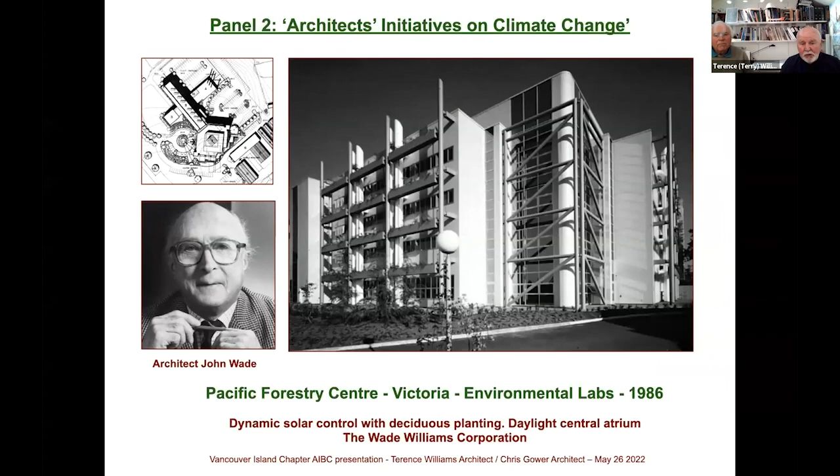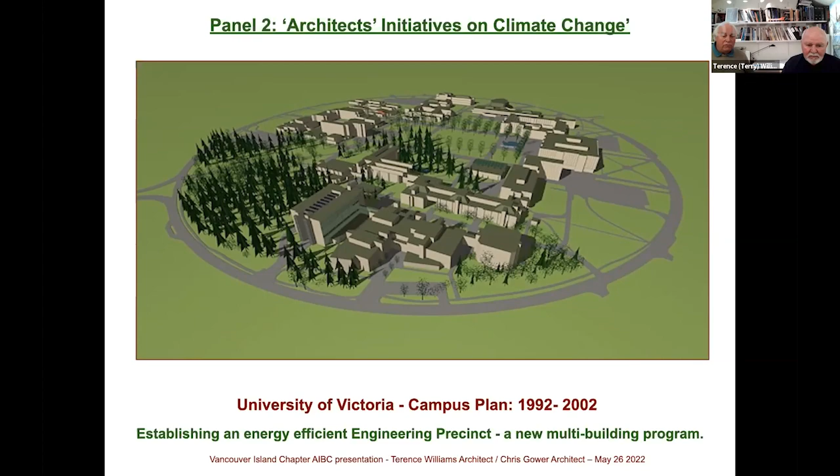Yes, so one of our big forums for our projects was at UVic, where Terry was commissioned to work on the campus planning for a new complex for the engineering faculty, the new department at the university. And we did the general site planning and then a series of buildings through the 90s. And they were very much attuned to sustainability and energy performance issues. The first building in that complex was the Petch building. And then the second one was the engineering office wing.

And this building was a quadruple glazing system, a 4-element curtain wall system, Visionwall at the time. We tried to tell the client that in this instance, perimeter heating would not be necessary. Bless his cotton socks, he didn't agree with that, so they installed a heating system. And then once the building was up, we proved that the perimeter heating system was redundant.

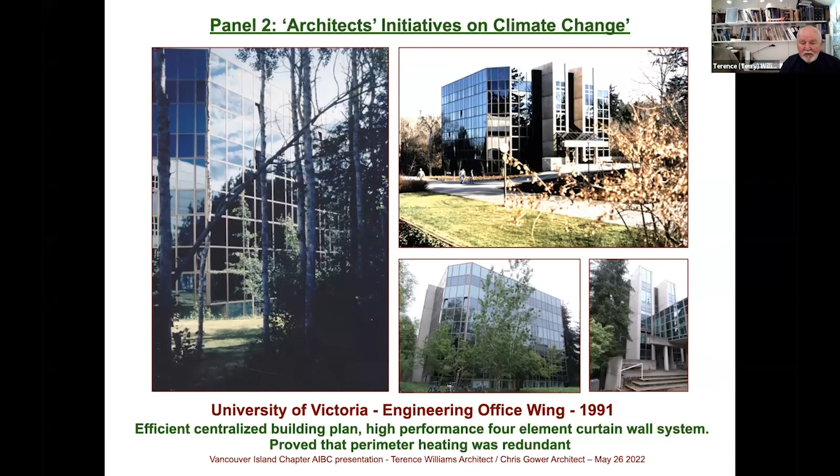So the next project was the engineering lab wing, much more elaborate. A lot of interest again in natural light, high performance window system, again, to minimize the amount of mechanical and the energy cost around the building. Natural light was reflected deep into the building. It had all sorts of measures to increase energy efficiency and sustainability.

Sustainability also relates to the lifespan of buildings. These buildings are all designed for a 50-year plus lifespan, which I think is critical in architecture in terms of contributing to a sustainable future. So in 1995, this was deemed to be the most energy efficient building in BC.

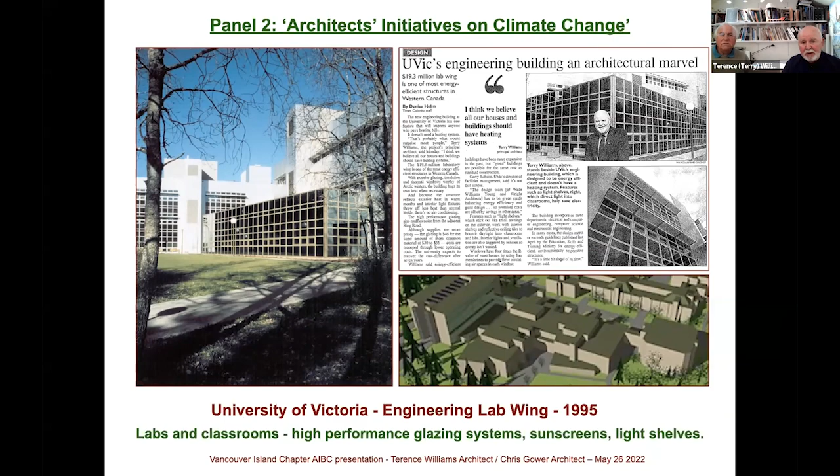That was followed up by the engineering computer science building late in the 90s. And again, it was a LEED oriented project. We were the first LEED gold large institutional building in the province. I think we actually got the second award, but we were the first submission. Big atrium building, interest in natural light and views.

The other thing I wanted to mention was the carry through and the involvement of project architects in projects. So you can see the atrium here. The air handling was a big function, using the atrium as a common void for moving the air up and down and bringing natural light in. We also made allowance for future solar collectors on top of the building. And again, some of the LEED credentials related to the views and the natural light through the atrium. Such a big building, we managed to keep the interior very pleasant because of those factors.

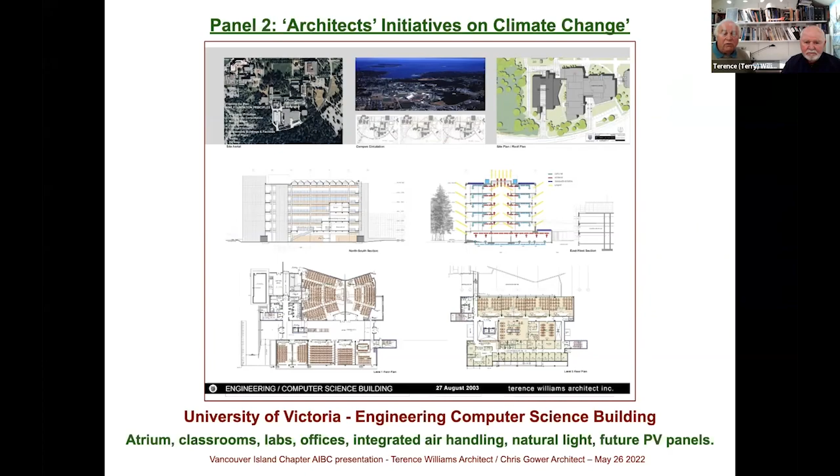The atrium face on the south. Again, in these projects, as an architect and a project architect, you have to devote yourself to every detail and make sure that they carry through. The sunscreens on the south face were actually in a separate price, and there were arguments to take them out. And as project architect, we had to do everything we could to make sure that they were installed to control the light and the solar gain on the south face of the building.

So there they are. And again, architects kind of work on the grand scheme of big ideas, but the application of actually what gets built is so critical.

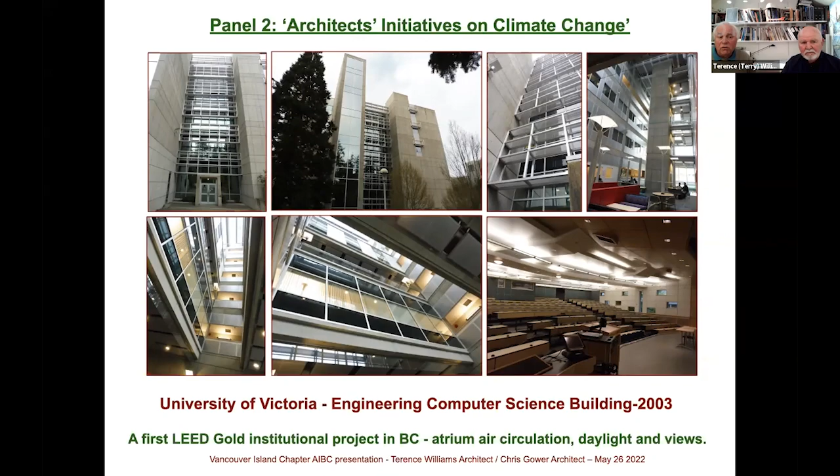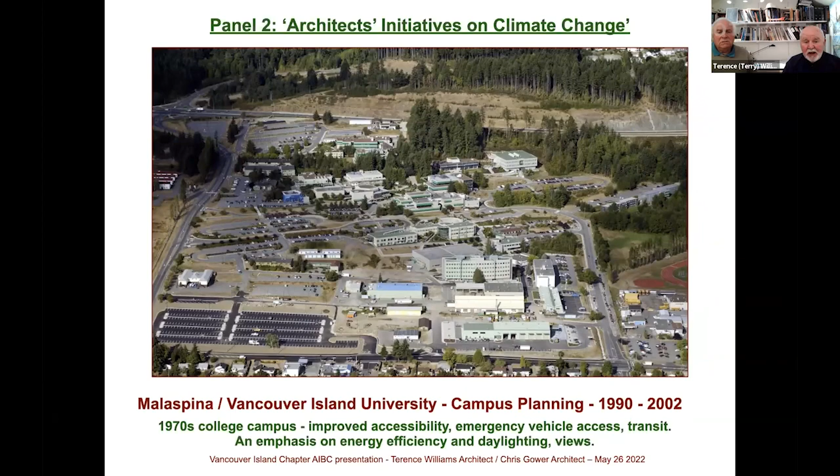Terry. Moving on then to essentially stepping out of single building design, but looking then at what was a Thompson Berwick Pratt college at one, and then we were engaged to do campus planning here. But from the client came the suggestion that we should actually be now looking at energy efficient buildings, and this was started in 1990. This is the overall campus plan, Chris.

Yeah, and we did a series of buildings, probably at least a dozen projects, including retrofits of the older buildings. We put new envelopes on these old wood-framed, wood-faced buildings, energy efficient rain screen systems, upgraded windows. All the new buildings were taken to the best performance available of the time in terms of energy performance. And the site planning had a lot of concern about accessibility, and it was a sloping site.

So we did a lot of site work orchestrating parking and pedestrian ways, water runoff, on it went. It was a great integrated project, and the individual buildings, I think, long-term, are still performing well. Some of the interesting things we did here: we were using quadruple glazing in 1990. We measured at one point the west-facing facade at 42 degrees centigrade on the outside of the glass. On the inside, because of the high-performing glazing, we were 21 degrees.

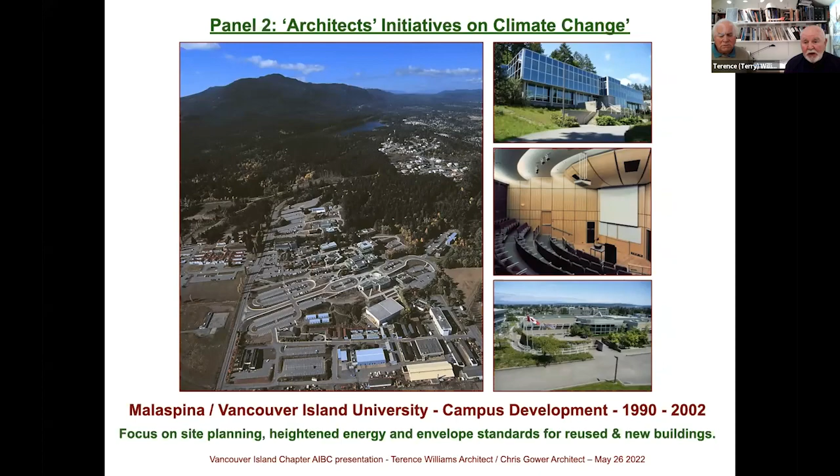So we were really feeling our oats in terms of glazing standards and interest in glazing, and we were commissioned by BC Buildings Corporation to look at the prospects for reusing the old BC Electric building, which is a landmark historic modernist building in Victoria, designed by Thompson Berwick Pratt with Ned Pratt and Ron Tom. It precedes the Vancouver BC Electric building. It was one of the first large curtain wall buildings in Western Canada.

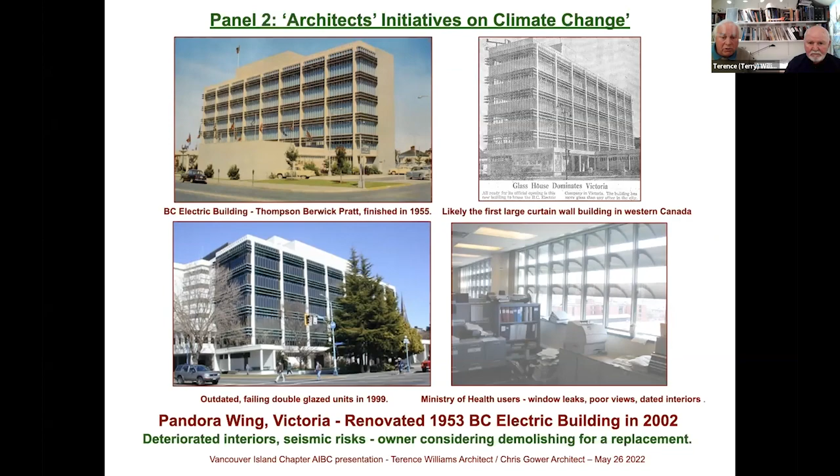It's a masterpiece originally of dealing with solar issues in the building: large curtain wall faces shaded by a sunscreen system. So it was a landmark building in Western Canada for modernist design, just a few years after the Lever House in New York City. We were aware of that architectural significance, but the building had to be updated. The curtain wall was failing. So we did intensive studies on options for the curtain wall. The client also was considering demolishing the building. So we were making the case to conserve the building and reuse it, which is a key component of sustainability.

Terry? Oh, no, let's go. Oh, the curtain wall. So you go.

Yeah, the curtain wall is, again, a high performance Conair 3, with actually a triple glaze system. We were able to reuse the sunscreens. We also introduced a viscous damper seismic bracing system, which is very innovative and has only been used in California. I think it's one of the only examples in Canada. It's a very dynamic system. Again, we were conserving the old building structure. We were able to reuse the sunscreens.

Thanks, Terry. Two levels. And we studied the sunscreens with computer analysis. We found that the original design was incredibly effective, and it also was designed to bounce natural light deep into the building. So we retained that. We could not use all the sunscreens, there was a lot of damage, but we found that only two levels of sunscreens did the job quite well and retained the views.

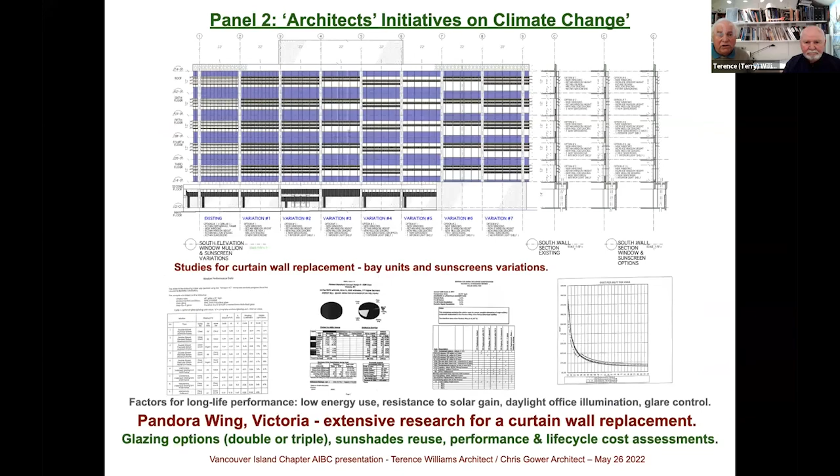The glazing, we studied all sorts of issues with glazing for natural light transmission, heat gain, heat screening, and views out. And we got the best example of glazing for this particular condition. The building is highly efficient. It's going to have another 50 years. The client challenged us with life cycle analysis to justify the whole project. And we were able to demonstrate, if you look long enough, it all pays for itself very nicely.

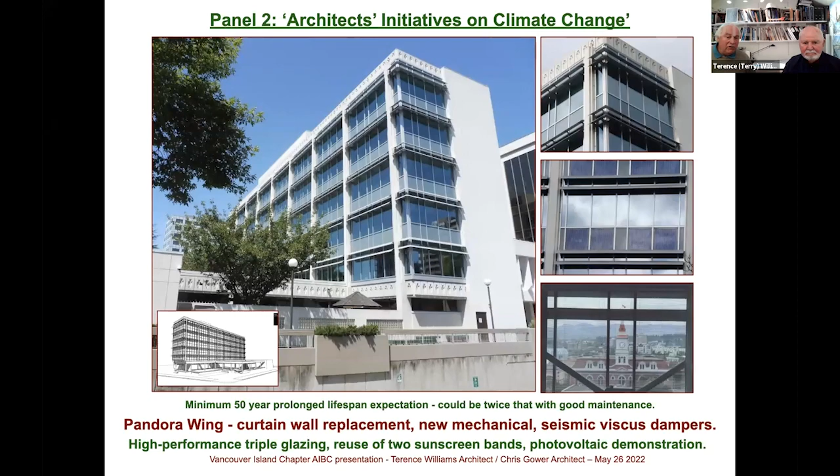So from the large scale to the small, we did a little cottage project for our structural engineer, John Wayte, and his wife, Judy. They were thinking of retiring out to a tiny Gulf island with no water supply, no power source. So we designed this off-the-grid little cottage for John and Judy.

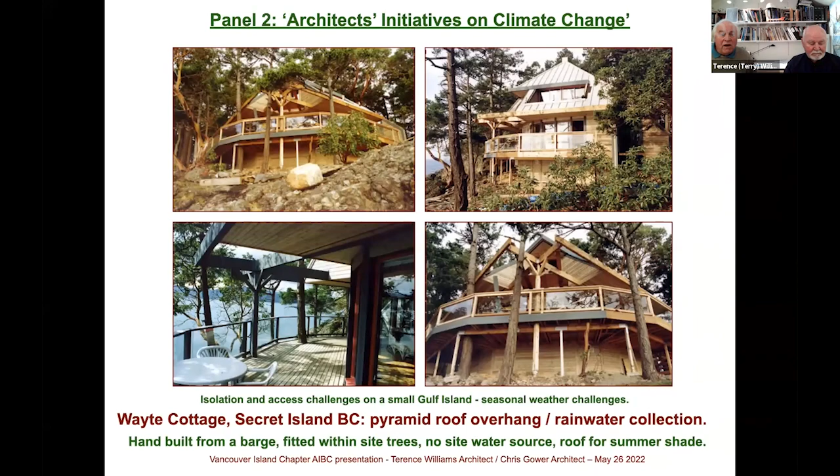And it's a really good example of, we may all have to be off the grid in a climate change future. This thing was designed with a pyramidical roof that captured all the rain and stored it. The roof also shaded the building and gave an overhang. It was all built from a barge by hand. It has its own little generator, its own water collection systems. They had lived there, I think, individually for over a decade.

And then moving on to larger scale projects, and obviously this is Dockside Green. In this instance, the initial project came from the City of Victoria, but particularly from Kim Fowler. And I'm not sure if you know that she has written a book called Dockside Green, the story of the most sustainable development in the world, she says. This is a very comprehensive planning study, and it's ongoing. It's the first project in Canada that we know of that was a LEED Platinum, and it's proceeding in that level.

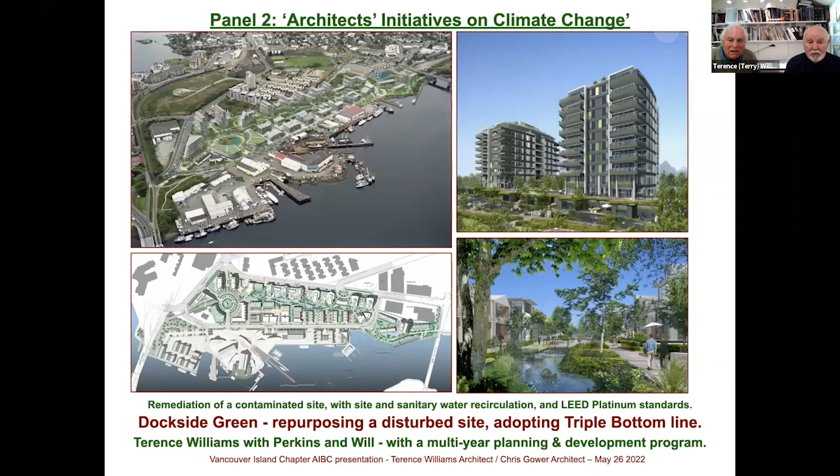So I worked on the envelope detailing of phase 2, and this again is where architecture gets applied, and the project architect has to pursue every detail of the envelope enclosure and the insulation and the rain screen. We used a very sophisticated panel system, Swiss Pearl panel, which has a very long life, huge step ahead from Hardie plank and so on. We were also able to insulate most of the exterior of the building. And the building also has a sunscreen system, which rolls down from a chamber above the south and west windows.

There was a phase 1 project also done for sustainability. We made improvements on the sunscreen system in the building, and also the air handling. I think there was a lot of attention to the quality of the air handling, all achieving LEED Platinum standards for this project. So again, the project architect really had to watch every detail and pursue them.

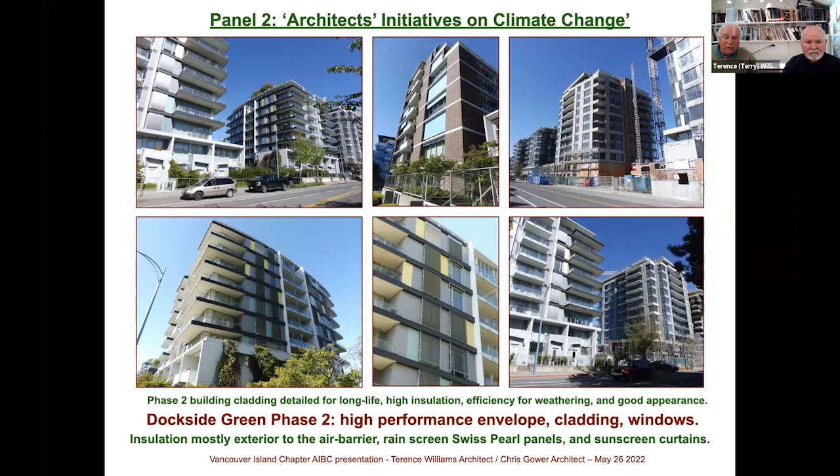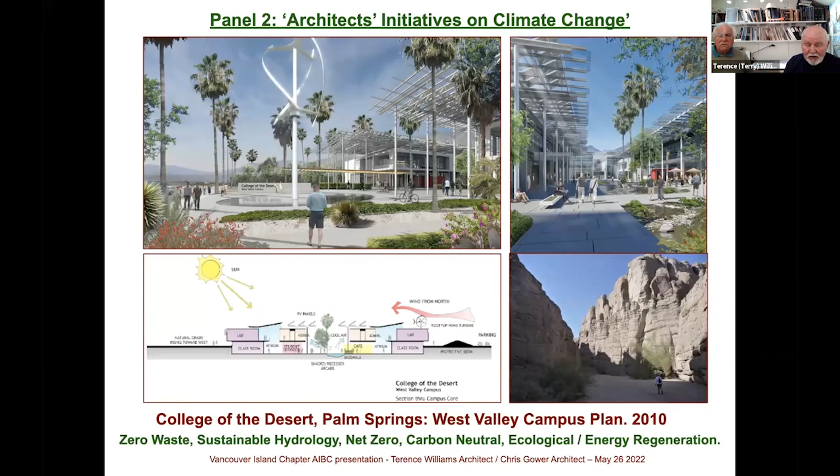And then moving on to a project that I was involved with in Palm Springs, which was the development of the West Valley campus for the College of the Desert. Involving here biomimicry, the box canyons of Palm Springs, and trying to interpret that for its long-term development. It's 160 acres, of which 60 acres were assigned to photovoltaic energy generation. This was essentially to be a net zero project, and a long-term development for the West Valley campus.

Also, I think it may be a model for survivability with climate change. We may find that half of the southwest of the United States is a desert, and we may have to have completely sustainable planning conditions. The other element of sustainability and climate change is how we plan cities. And that's really one of the biggest gestures, involves planners and public administrators and architects. We have to make our cities more intensive and more sustainable, reuse more buildings, reuse the infrastructure, and yet still keep the cities vital and interesting.

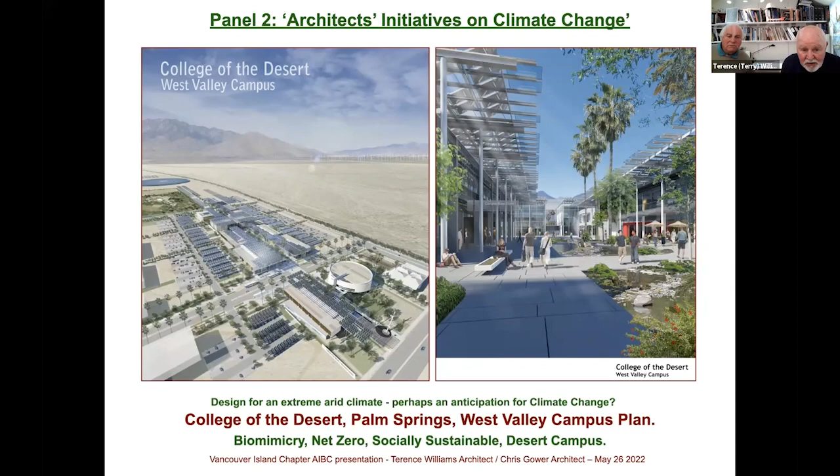I'm very interested in the history of cities. That's part of sustainability too, keeping our identity and our range of heritage context as well as new buildings. So I think that balance is really important as cities move ahead. Survivability is going to be a big topic in climate change. Yes, when it comes down to resiliency of single family dwellings to cities, I think that's going to be the issue.

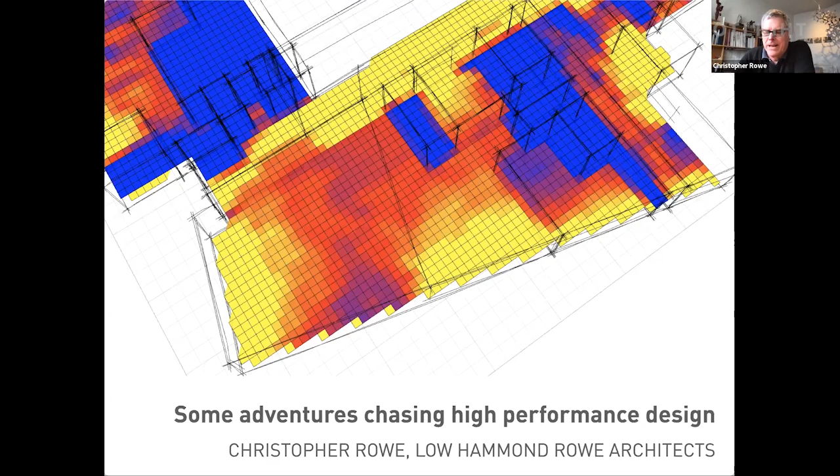I'm going to attempt to tell a little story about how I've learned over the last 20 years how to try to lead and try to get more control, I guess, over the performance of our buildings. So it starts back in the late 90s with an assignment to pursue LEED Gold for the Vancouver Island Technology Park, which is an old long-term care hospital under the care of BC Buildings Corporation, who were just getting the religion at the time. And I believe this project started under LEED 1.0 with the US Green Building Council, and that's how it was certified originally.

I point this out because I think we've moved on a long way from LEED. Obviously, there's still clients who are pursuing LEED. My critique of LEED is it doesn't go far enough with the pursuit of lower carbon, lower energy use in buildings. I note that even today, you get maximum points for only 50% below a baseline design, and I think we can do way better than that.

So I've been involved in a few LEED projects. Another notable one, when I was at Cannon Design, I was a sustainability facilitator for a 23-firm team of consultants for this project. Again, a lot of it had to do with ticking boxes to get that LEED certification, notwithstanding the fact that I think there were some excellent integrated design outcomes, particularly in terms of carbon storage with the extensive use of wood and a very ecological approach to dealing with the vast amount of rainwater that came off the building.

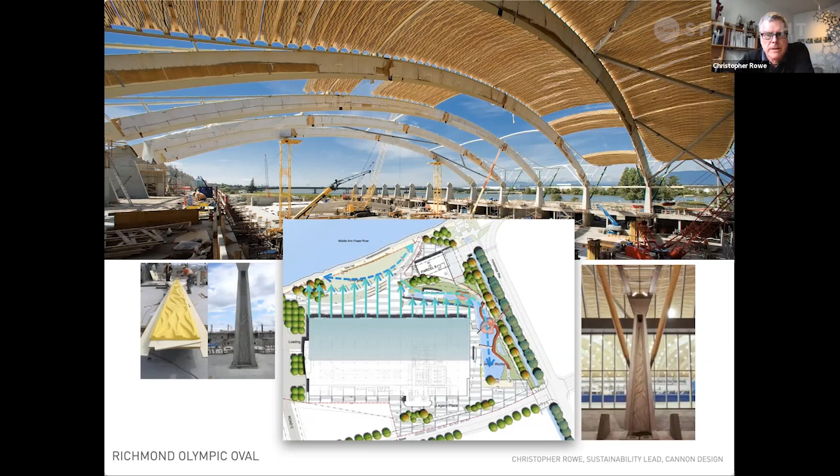But moving on, another LEED Silver project where I felt better able to lead integrated design teams and to push the agenda a little harder rather than waiting for mechanical engineers to do energy modeling after the fact. So this was an example of pushing hard on building form to reduce, in this case, particularly cooling load on a large south-facing elevation. Just by angling it, we reduced the cooling load by about 18%, I think, on this project.

But still waiting for the tools and the expertise and in a way the permission to take a better hold of the steering wheel of the project. And I think this is, as architects, a unique and privileged position. In the old days, it was the integrated design process. Now there are new formats for working together with multidisciplinary teams. But we still have to push the agenda.

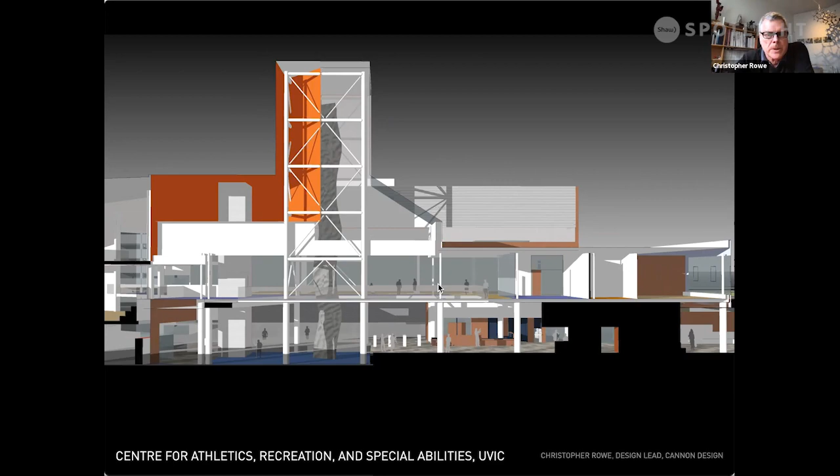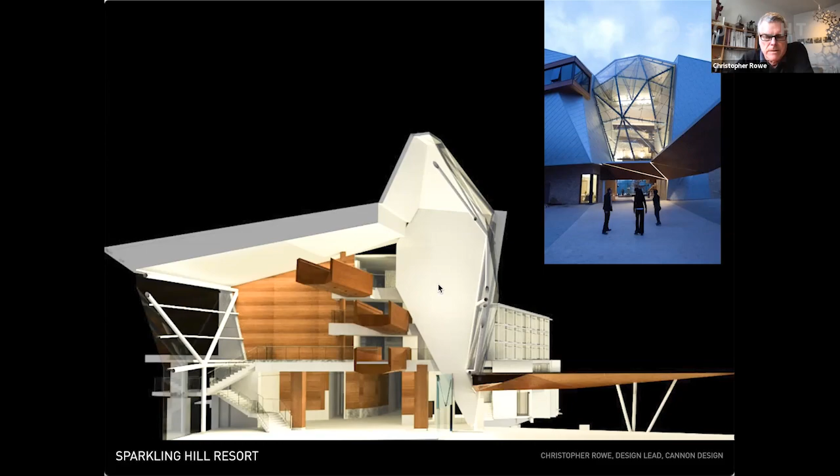So over the years, we've tried a lot of tools for evaluating the performance as early as possible in the design process, rather than waiting for milestone energy models from an energy modeler or from our mechanical consultant: Autodesk Green Building Studio, Sefaira as a plugin for SketchUp. I think both of those in our usage have been superseded by DesignPH, which is a plugin for SketchUp, and also Energos, which is a part of Vectorworks.

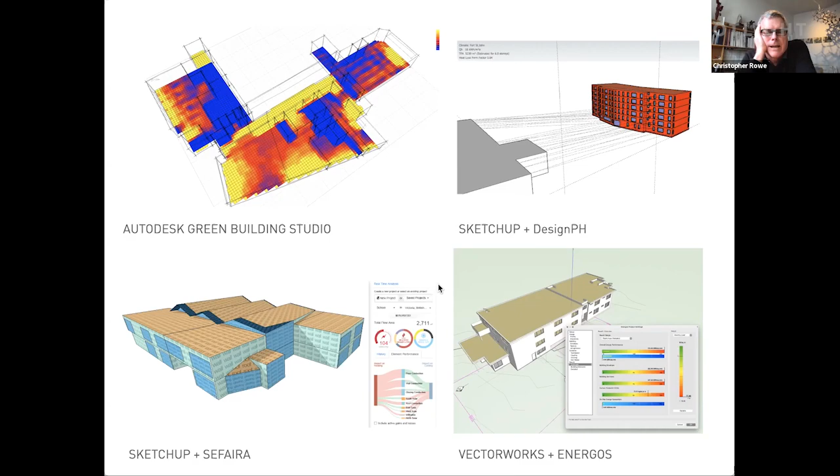Energos is based on DesignPH, the PHPP, Passive House Planning Package from the Passive House Institute, and it's cheaper and just as accessible as Sefaira, and provides some really useful output. So we've been using these tools now probably for the last 10 or 12 years to try to get ahead of the rest of the team in terms of evaluating our architectural ideas for their performance outcomes.

Here's an example. I have to put a little bit of eye candy into the presentation. Recently completed last year, the junior school for Glenlyon Norfolk School, built around a central learning commons, a double height, interconnected floor space that is all about pulling air in from the outside walls, so that when someone in the classroom opens a window, there's actually a positive air movement from the outside in to the central core, which is tied into the central HRV system. So it's been really good for the COVID era in terms of 24/7, 100% fresh air to all areas of the building, leveraged by building form rather than just fan energy and ducts.

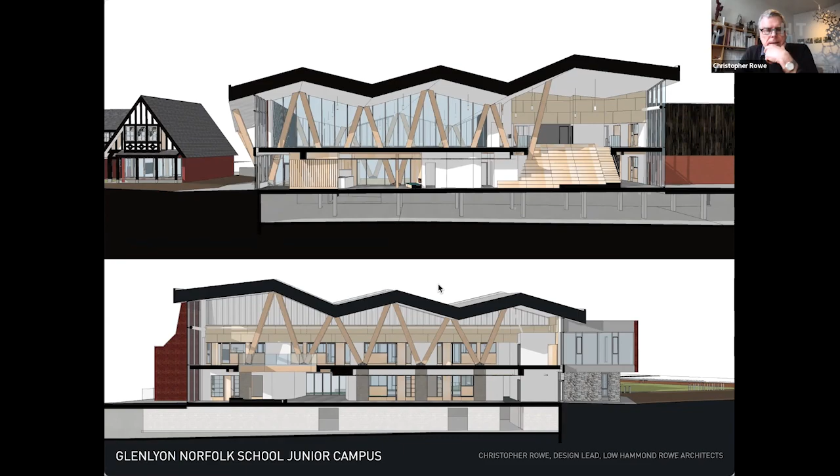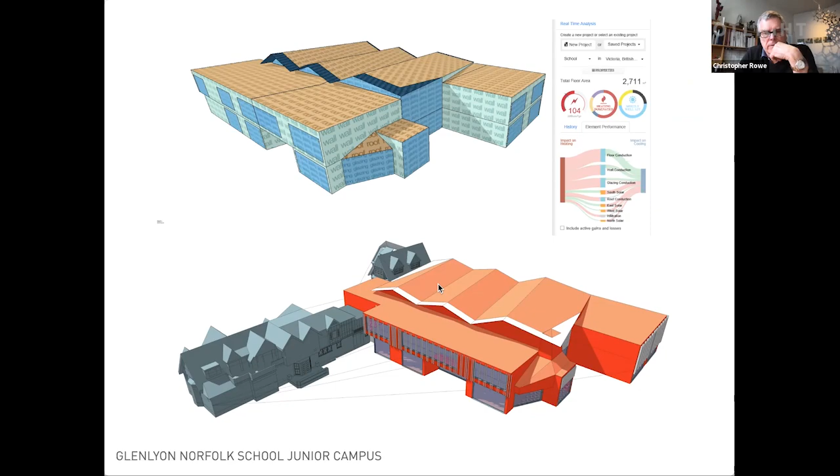This was a case where the client was not particularly interested in hitting a target or getting any certification. We didn't have an extensive consultant budget for energy modeling, so we took control as we developed the massing. We were looking at it initially in Sefaira and then in DesignPH to see how we were doing and to evaluate the effectiveness of shading devices, which you can see on the facade here, used not just to provide passive shading, but also to tie in with the architecture of Rattenbury's old house, which is part of the campus. Some views of the interior.

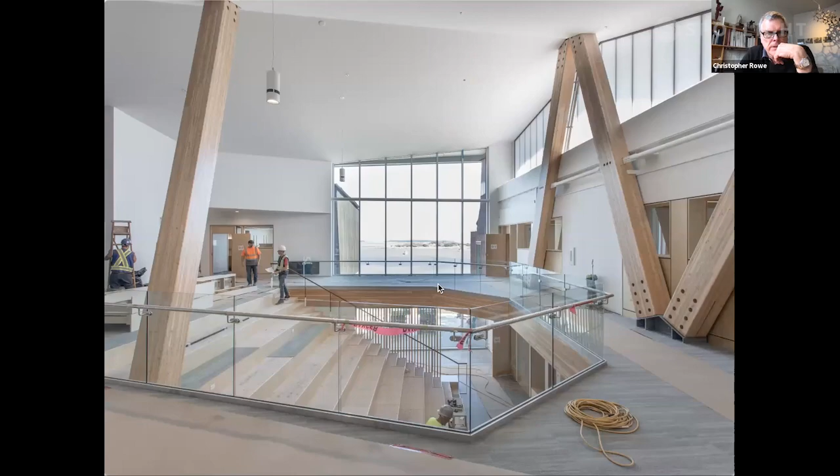Now a project that was led by my partner, Paul Hammond, a 50-unit passive house apartment for BC Housing in Fort St. John. At one time, this was the largest passive house building in Canada. I'm glad to see that that's long been superseded.

This was another, well, you can't do a passive house. I'm sure our other panelists will be talking about this too. You cannot do a passive house without understanding its performance as early as possible in the process. So this included a fairly extensive study of options and orientation of the building. Surprisingly enough, the conventional wisdom about orienting your buildings with a long direction in the east-west axis isn't borne out in multifamily housing, and the north-south actually works way better.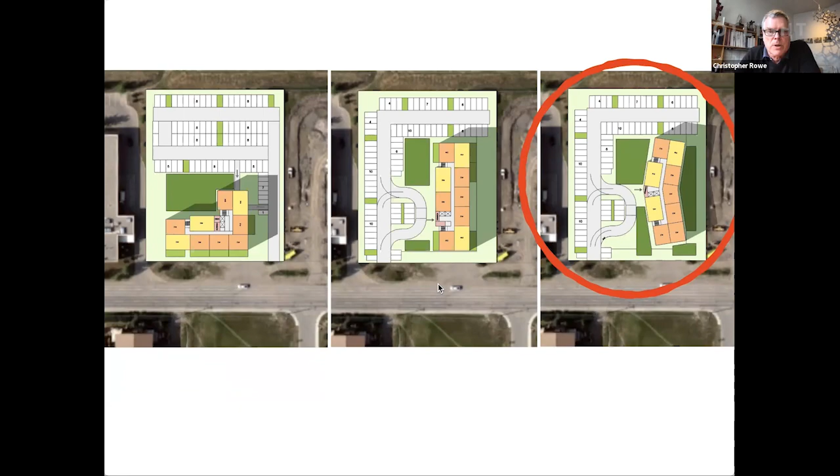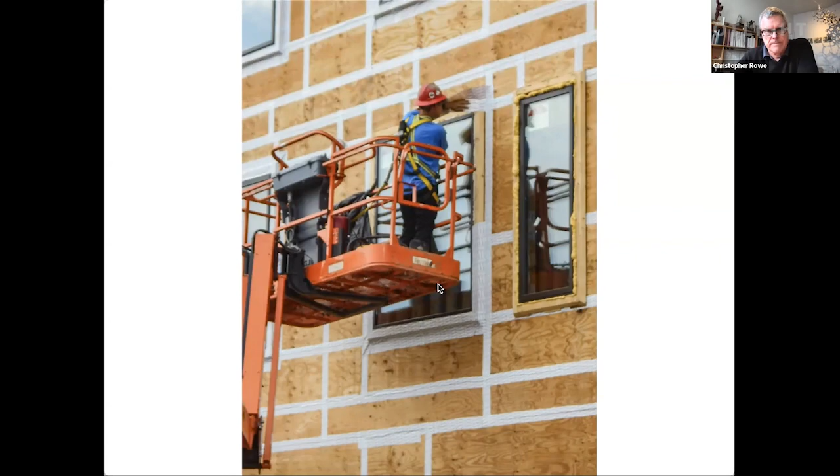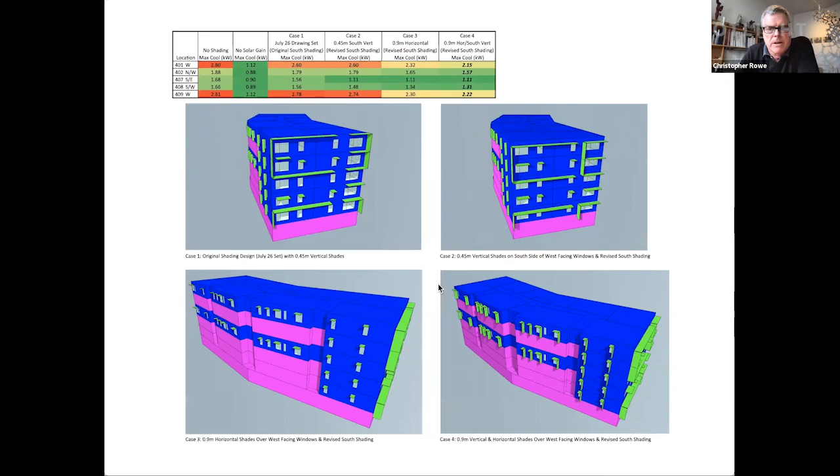Sun shading was tested in this case using IES virtual environment by our energy modeler, resulting in a kind of optimum, I guess, solution where it was only being put where it was needed.

Now, we do a lot of work with BC Housing, and I'm pleased to see that BC Housing, among other institutions in the province, seems to be leading the way now in terms of achieving the highest possible performance for energy, for low embodied carbon, and for building in features that enhance resilience on multiple levels. So these are the sorts of things that they are now asking us to look at.

We're actually involved in 2 pilot projects. One, a housing project for Tsleil-Waututh Nation in North Vancouver, where BC Housing is trialing this MBAR program. Some of you may have encountered it or be aware of it by now, but I think it's going to become a regular feature of projects for clients like BC Housing. This involves kind of whole team integrated assessment of risks for all the various climate outcomes that we're expecting. We are designing now for BC Housing using 2080 climate data.

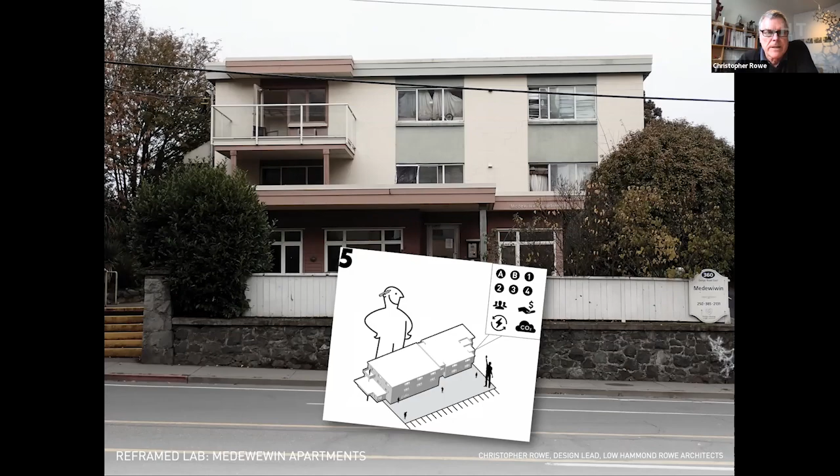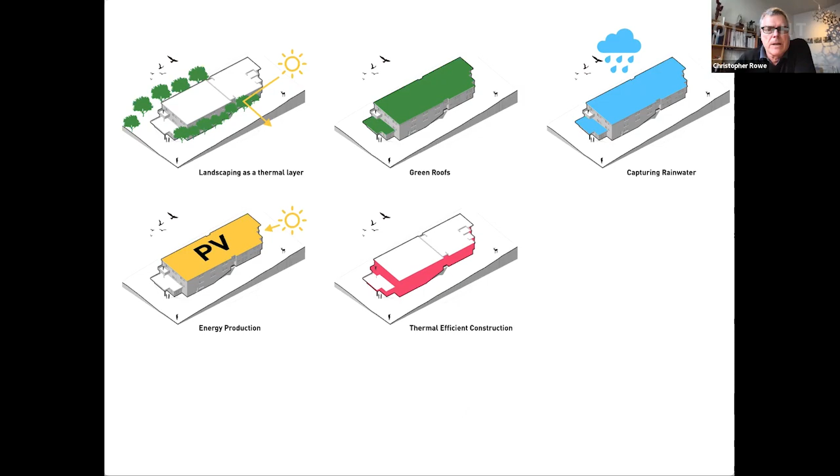So this is our project for the Reframed Lab. It's a rather tired old building used for supportive housing of at-risk, mostly Indigenous clientele. It has 2 parts, a 1963 motel and a 2002 addition. And in this project, we are not only looking at holistic strategies for building in resilience into the building for at least the next 40 years, but also evaluating the cost and performance benefits of various approaches.

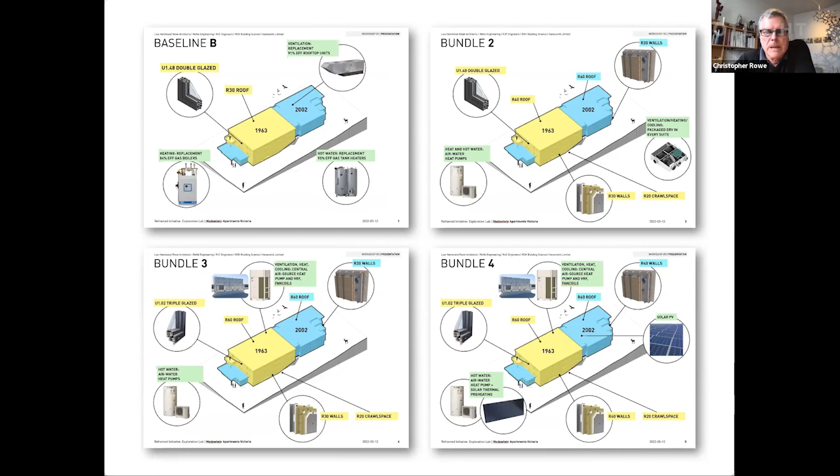So we have looked at 4 different bundles of upgrade measures for this project and compared them against 2 different baselines, both the existing building and a kind of business baseline. B up in the top left represents some modest improvements that would basically bring it up to business as usual, so kind of current codes. The exercise has involved a lot of modeling of each of these bundles, a lot of comparisons, and some really interesting findings are coming out of it, particularly in the realm of diminishing returns for some of these measures.

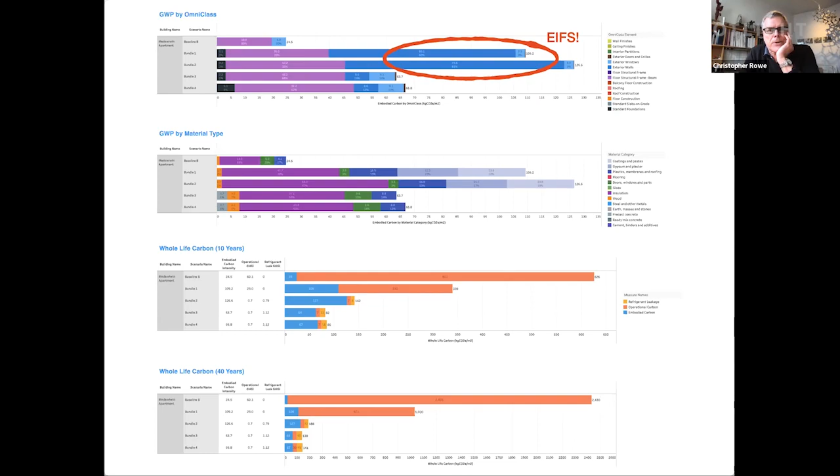Embodied carbon, really important. Choice of materials, really important. Huge amounts of embodied carbon in plastics such as EIFS. And I think this is really the bottom line: projects need life cycle costing to demonstrate their benefits. So there's like a 20-year payback on this project for a 40-year lifespan and a positive return on investment for the midline bundles that perform almost as well as the higher end ones.

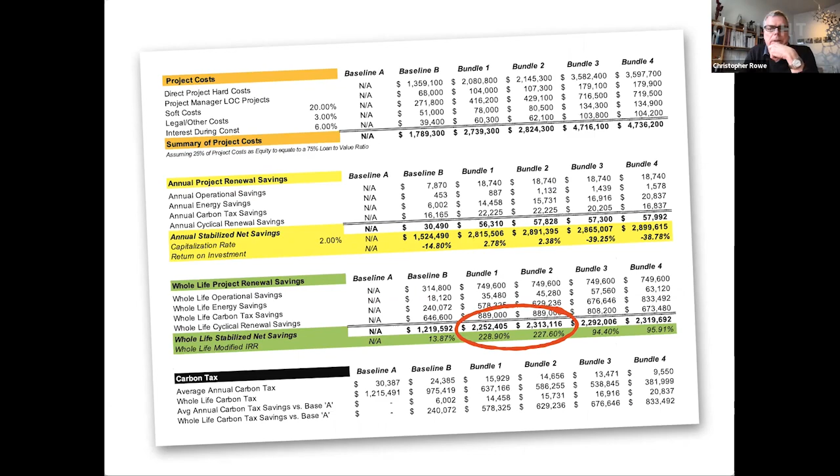I'm coming to you from the traditional territories of the Musqueam, the Squamish, and the Tsleil-Waututh, now commonly known as Vancouver, although of course we practice in Victoria, Vancouver, and across Canada. In sharing that, for us, it's really important. We reflect upon our responsibilities in recognizing that the act of building, which we're all part of, is certainly central to the colonial violence and colonial impacts on these lands. And so for us, we can't separate these conversations, and it's important for us to ground ourselves within them.

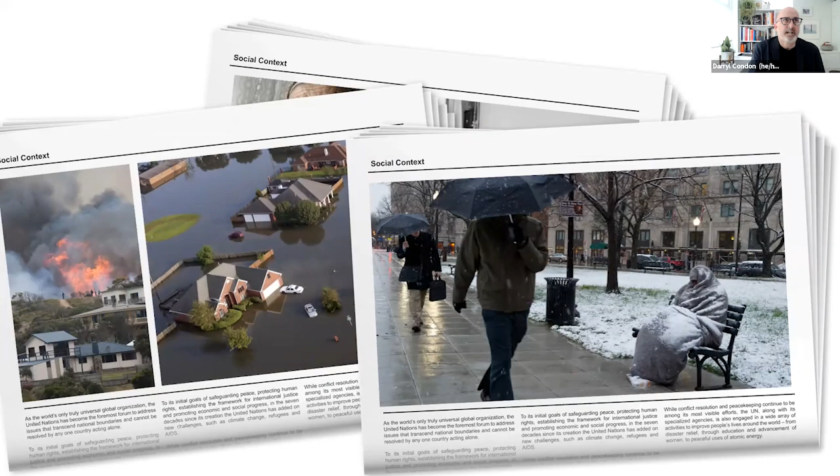I'm going to talk more specifically about a single project and how it's framing, I think, an attitude or approach that we have for the future. And so we really are concerned about some of the big challenges. Climate crisis is obviously one of them, but there's a whole series of big crises right now that in our mind are intersectional and cannot be thought of in isolation, whether it be the social inequities that we're starting to better understand, issues of reconciliation, income disparity, homelessness. There's just so many issues, and we really take an approach that tries to address that, because we're asking ourselves: are we doing enough to impact change?

We've all seen these diagrams of the three-legged stool of sustainability, but most of what we've already talked about today really focuses on the environmental aspect, and this is something that we're really committed to changing, bringing a much more balanced approach to our design. So thinking simultaneously about environmental performance together with social performance and the economic aspects as well. And we're really inspired by the economist Kate Raworth, her doughnut economics work, which I will here really dramatically oversimplify. It's a really good representation of our beliefs. I really encourage you to buy the book, read it, and then lend it to someone else.

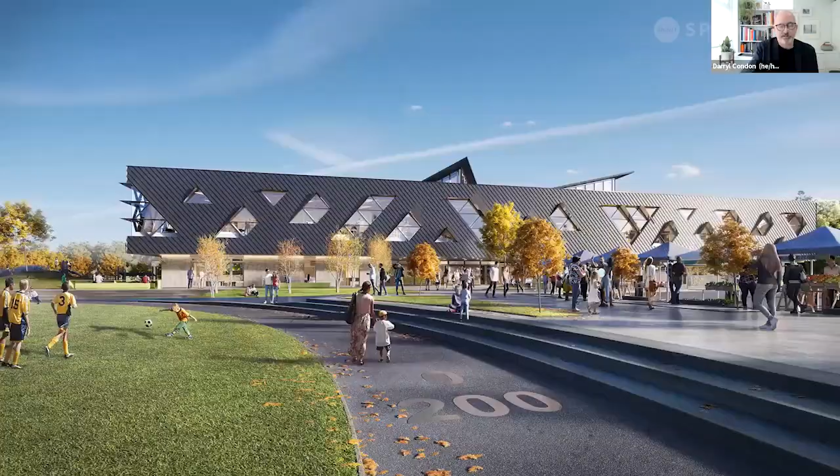A recent project we completed in Surrey, the Clayton Community Centre, is a project I can use to demonstrate how we're putting that into practice. There's really two key threads that I want to talk about here. There's a really important passive house story. This is a community building that's passive house certified, which is really not an easy feat, believe me. But that's part of the story. The other part is the application of our emerging framework for being intentional around social impact, our social impact framework. And I'm going to talk about how that impacted our design process and the results of this project.

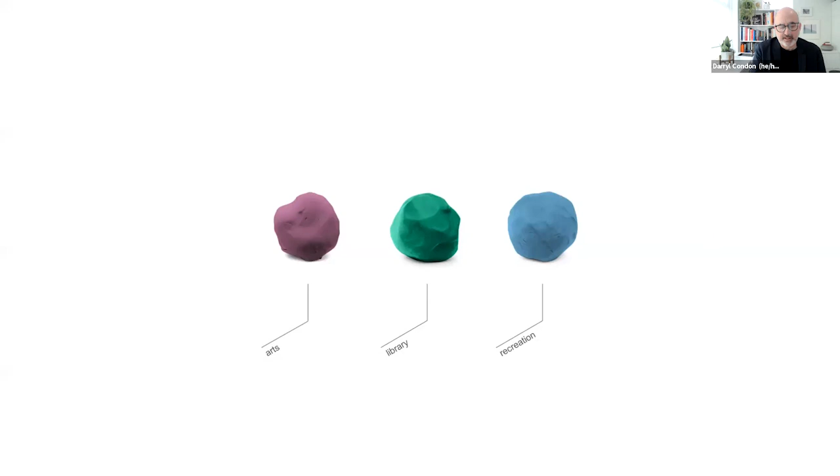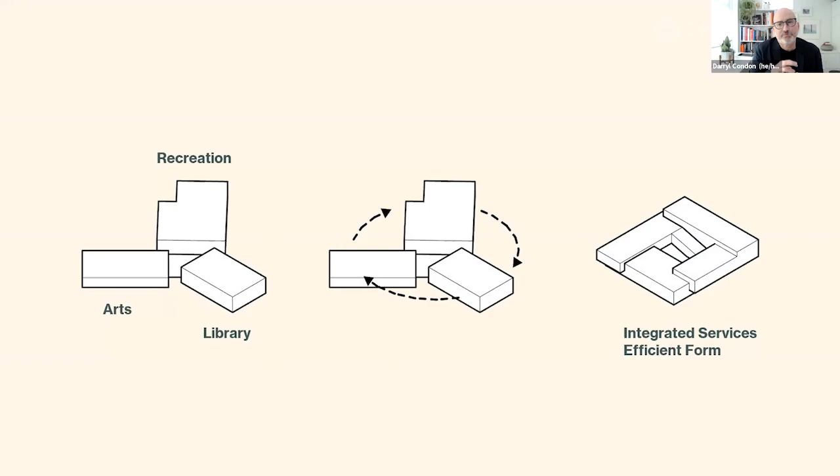Now, just a little bit about the project. It's an integration of arts, library, and recreation services. The desire was to have something that wasn't co-locational, but really deeply integrated, boundaryless. So from a formal standpoint, it wasn't about separate arms or tentacles. It was really about bringing together, which suited an approach to passive house really well. Clayton is a sub-area of Surrey, a very dense contemporary suburban context. Stacked row houses, very dense, very little public space. The site was a former elementary school, a treed site, and this gives you a sense of just how populated this area is, how many kids there are.

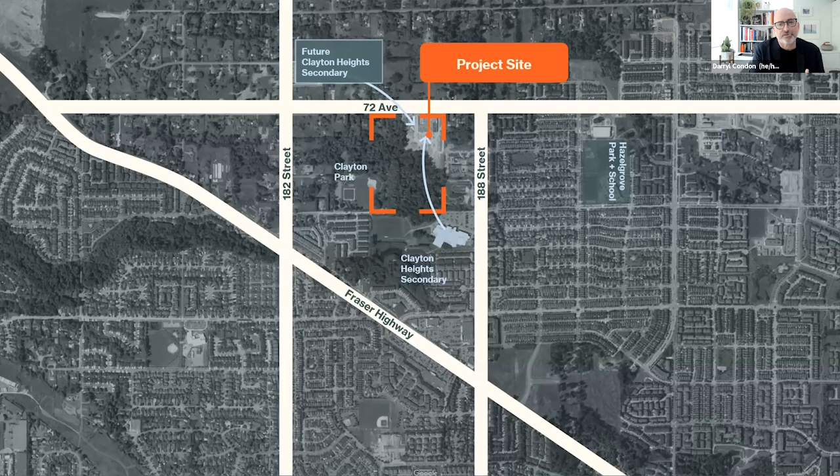On either side of the site were public secondary schools. There's just so many people in this area. And so we looked at the site. We started by understanding the natural movement patterns. We did not want to cut down any trees that hadn't already been removed. So we really worked with the clearings that were there and positioned the building within the sort of circulation and movement patterns that already existed within the neighborhood.

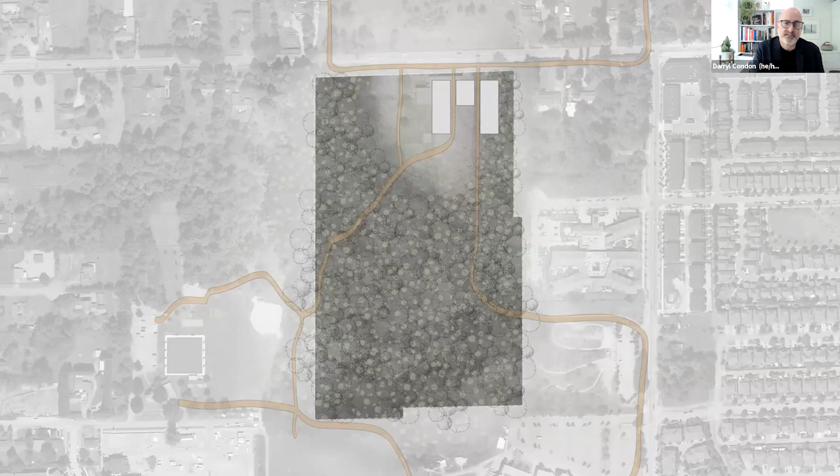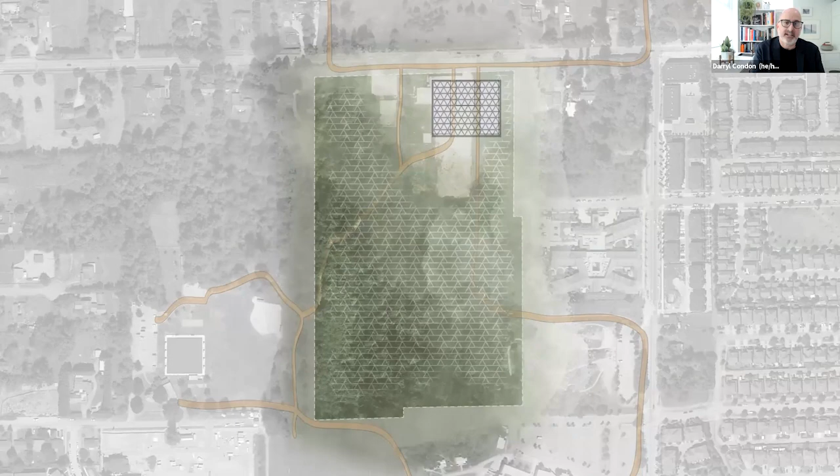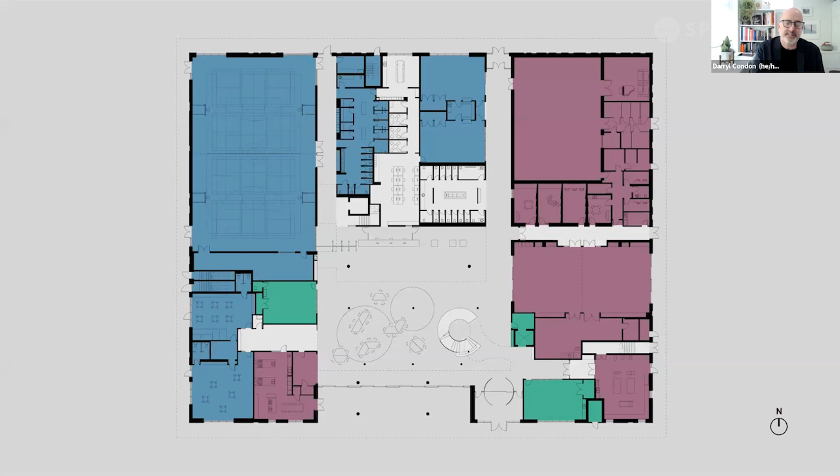And then our architectural strategy was to try to extend and reestablish and use the forest as a metaphor for coming together and explore the characteristics of a forest in the building. So here you see the ground floor plan, where the color coding represents the three different uses, and then the primary social spaces in the middle, really without boundaries and a high level of interconnectivity and flexibility between uses.

In the center of this was this place we called the Commons, inspired by the town square. It's really this open to all space that was without specific programming, and this repeated on both floors. And that common space for us became a physical recreation, I guess, or at least we were inspired by the notion of the clearing in the forest and the qualities of that space, the spatial conditions and the light conditions and how good it feels to be in those types of spaces. And so that's really what we were striving to achieve.

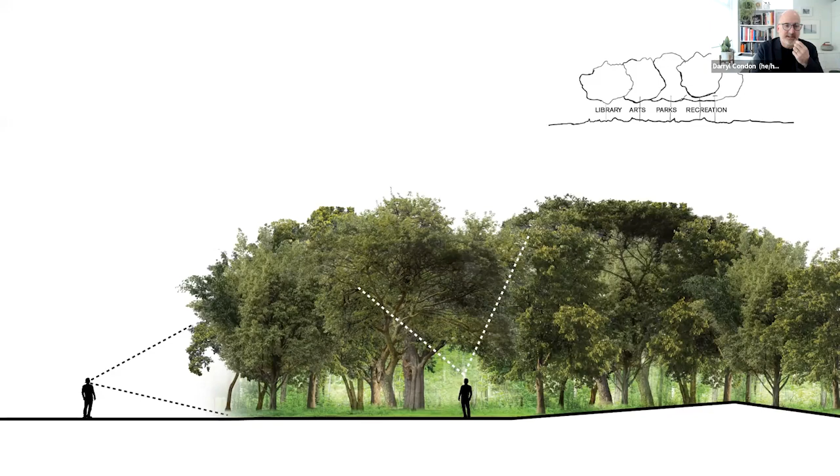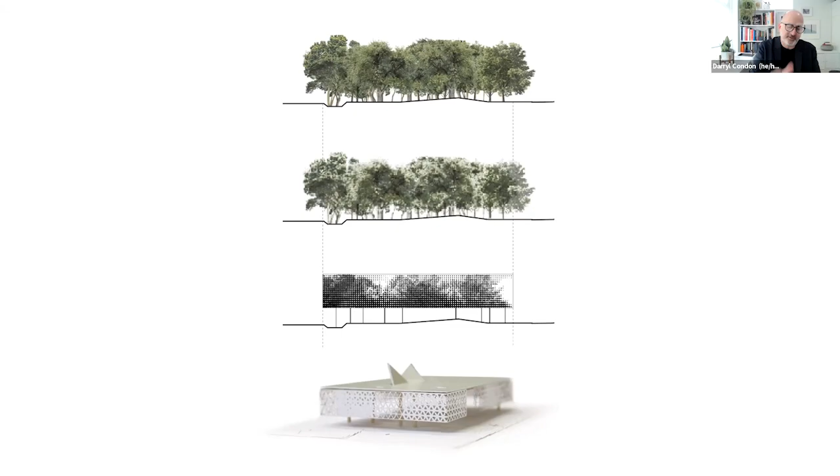And then, starting from that point, we abstracted the notion of the forest, the trunks, and the sort of collection of trees that became more than a single tree. It became this whole element that was elevated above the ground plane. And that really became the driver and the sort of parti of this project. The upper floor followed that same pattern, primarily the library, but also recreation and arts spaces as well.

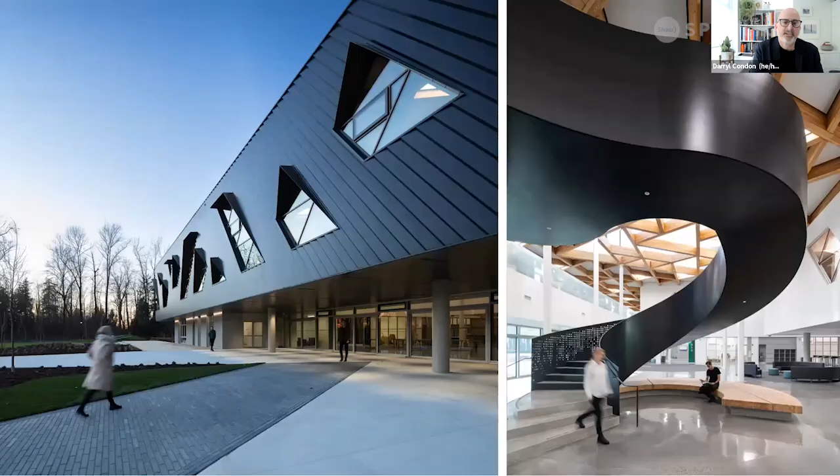So here you see the building in its context. It was a bit of a victim of the pandemic. It was finished early in the pandemic, and so really wasn't operational until quite recently, but we're really pleased with how the community is now starting to discover the building and utilize it as well. And there's lots of architectural stories I could tell here about how we planned, or the structural system, or the technical aspects of how we achieve passive house. But it's more than I can cover in the time that we have. So I really want to focus on our design process and what that meant for us.

And passive house, and I think the industry's starting to understand the importance of things like passive house. We're huge believers in passive house, because for us it's the gateway to so many other objectives. Creating tight envelopes that are ultra low energy makes it so much easier to be net zero. It encourages a way of thinking and an accountability that is really valuable in the process.

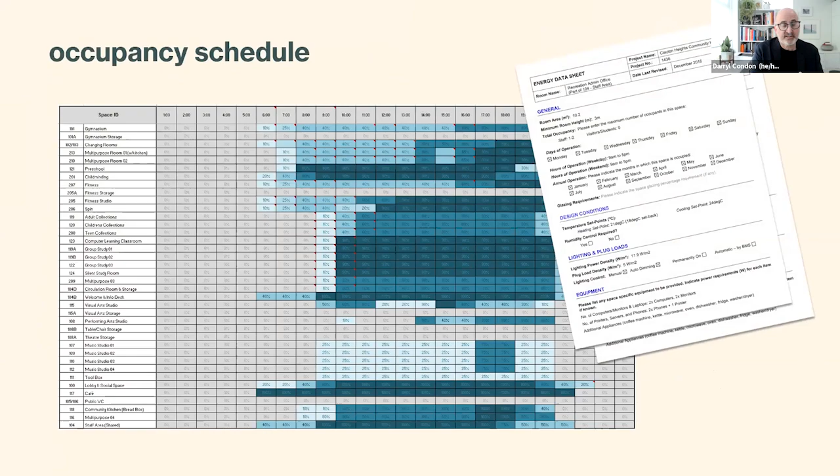But we have to understand the usage at such a different level. We start with understanding the users and the tenants, really understanding who's going to be in that building, looking in real detail at the occupancy schedule in a building that will ultimately be heated by its occupants. You need to understand how many people are going to be there. You need to understand how many things are going to be plugged into the wall. The level of detail, the level of understanding that we need to bring to this building's operation is a completely different way of designing, and at a completely different stage of the design process to conventional ways of working.

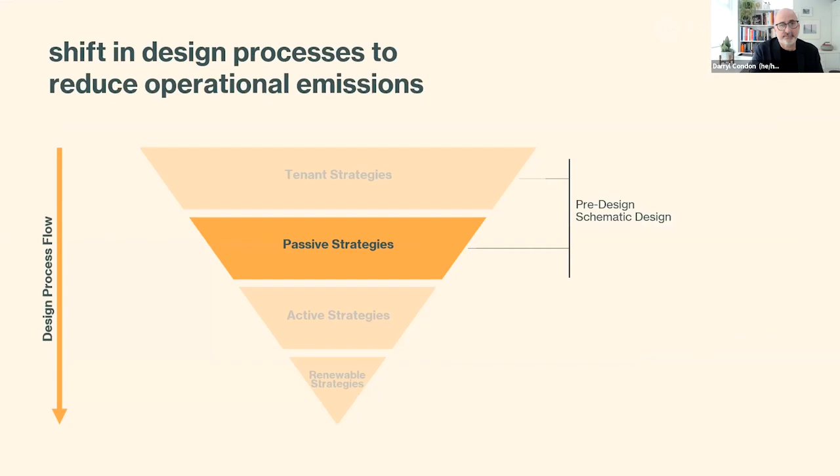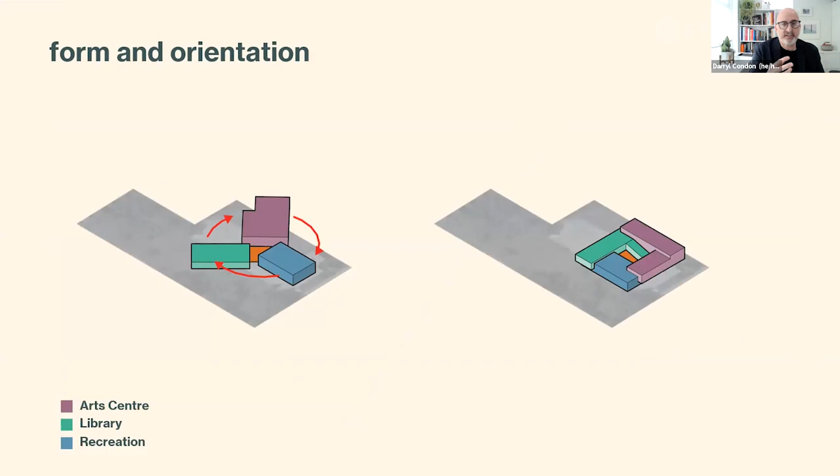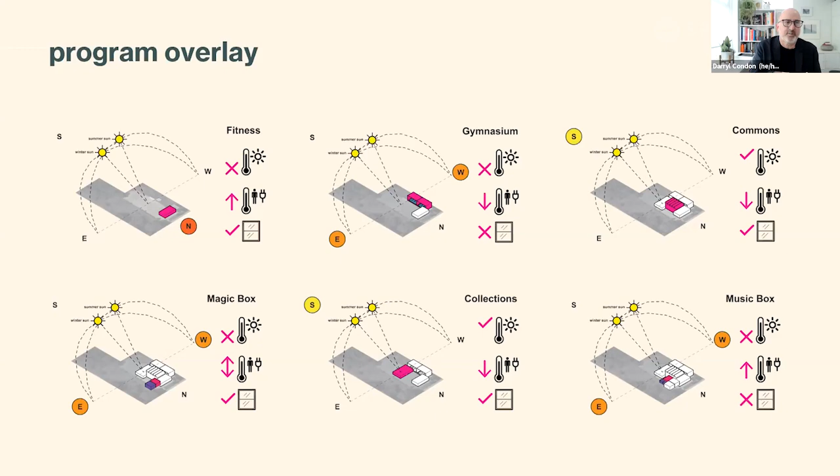So once we understand and start building upon an understanding of the use and the tenants, then we're looking at what are the passive strategies. How can we orient these things to maximize the benefit and be logical in terms of which elements require more heating or cooling, or what are the symbiotic relationships that are possible between the spaces. And so we start looking at each individual program block and understanding its characteristics. Is it going to produce heat? Is it going to require heat, etc.? Does it benefit from the sun? Does it not benefit from the sun? And that really became a key driver of this three-dimensional jigsaw puzzle about what went where in this project.

And so with a passive house approach, you're creating a balance, and you're minimizing your energy use in a lot of different ways. But certainly, if you can balance your heating and cooling, if you can offset those, you're really helping to drive those energy costs down.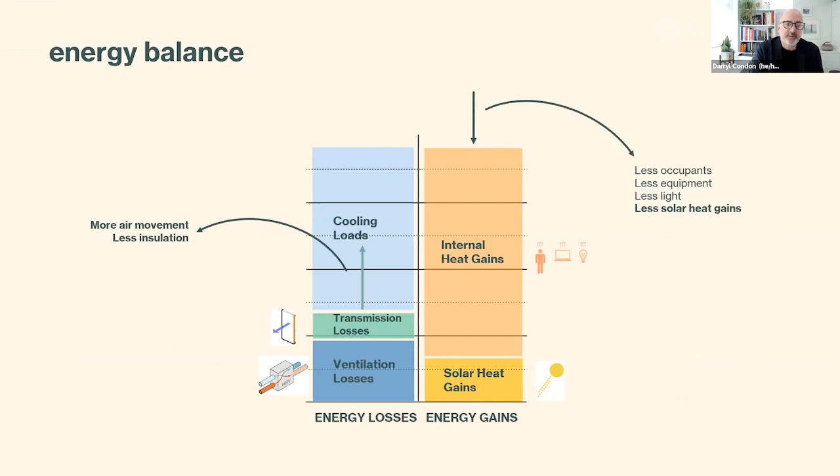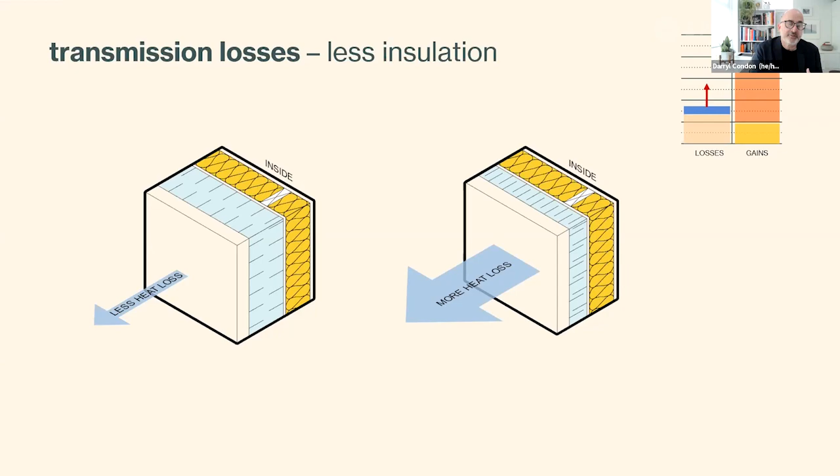And I'm dramatically oversimplifying, but we look at, and sometimes, much like Chris referred to in sort of the counterintuitivity, or at least challenging some of the things we thought we knew about conventional sustainability thinking, more insulation isn't always better. Sometimes less is better, and you have to actually study each application and each orientation and each surface individually to understand where you might be tuning the building to more or less heating loss.

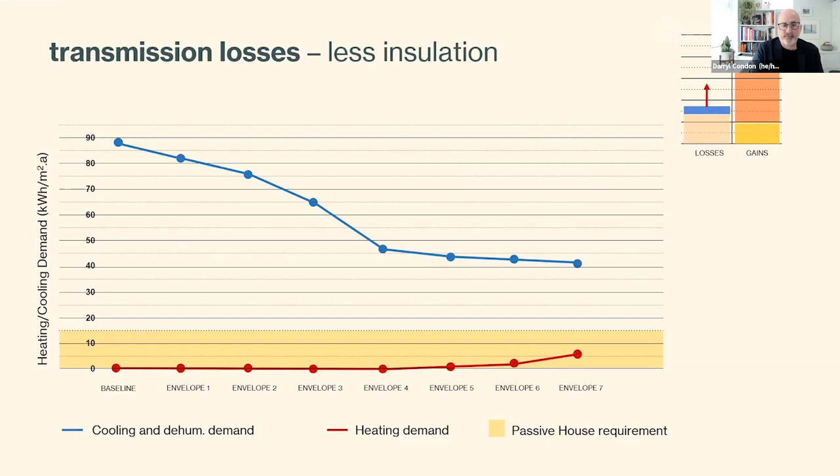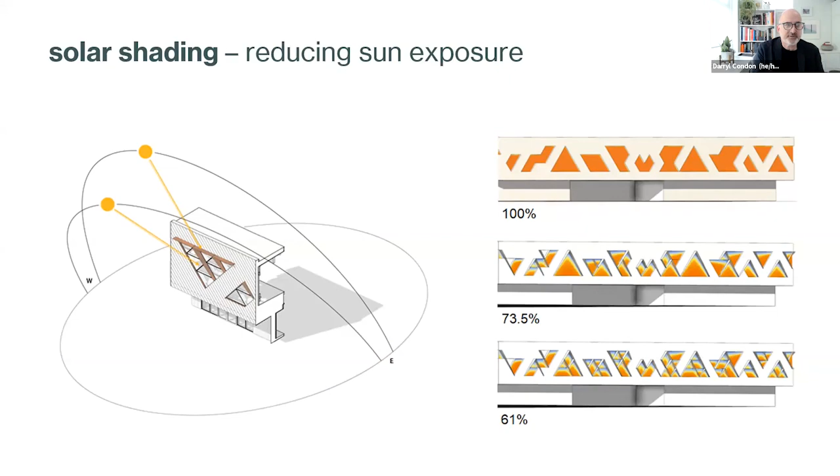So, we look at different envelope approaches. This is not that unusual to some of the other things that we've been hearing about or doing, but the same process, and you're driving down that cooling demand as much as possible, and of course watching the heating demand as well. And then once you think you're getting someplace with the envelope, we start integrating notions of shading and how we can reduce the heat gain, reducing the need for cooling, and so on as a result. And that then starts helping the system as well.

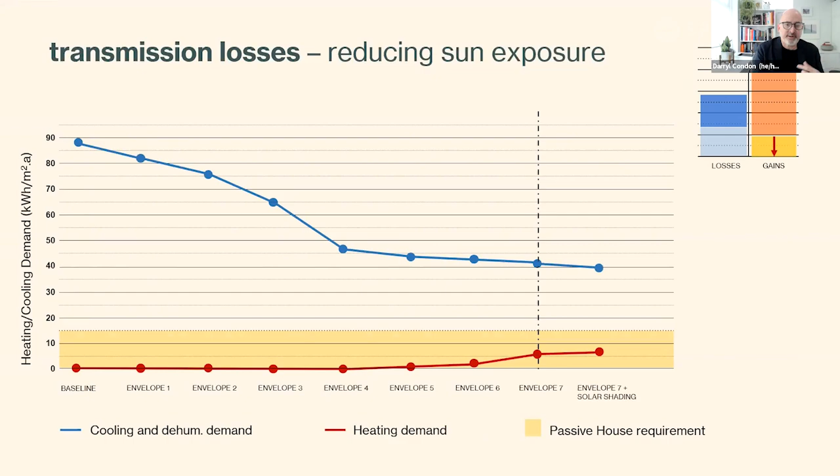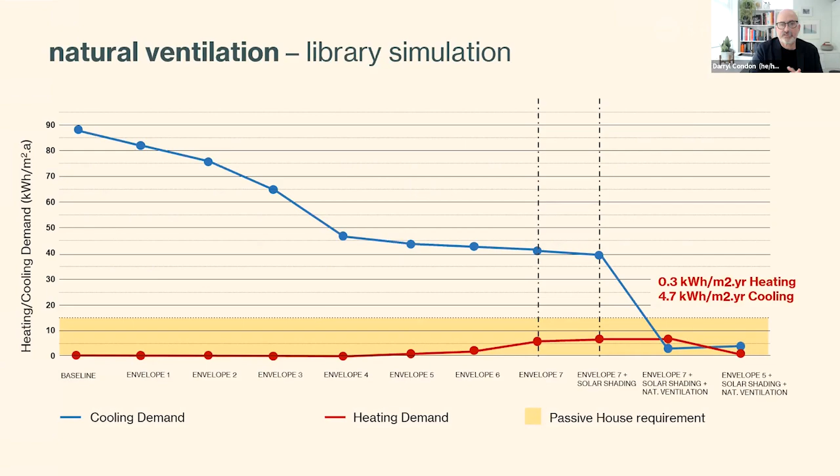Big breakthrough on a building like this is when we start looking at ventilation and losses from ventilation and looking at natural ventilation. And this is where we really start seeing the energy performance of this building come down into that passive house zone. And it's interesting to reflect. For us, the West Vancouver Community Centre was a really important project, LEED Gold, now about 12 years old. It was LEED Gold with geothermal and all what was then state-of-the-art environmental processes and procedures. And the energy performance now is less than a third of what that was then.

And so it's just interesting and reinforces how critical it is for us to continue to push for higher and higher levels of energy performance, and in fact, we need to go much, much further as well. But for us, Passive House is a key strategy. It's not easy in North America in public buildings, but it is absolutely something we need to push the industry forward.

So the other thread is the social impact framework, where we're being intentional about social performance, social goal setting. There's lots to this as well. It's based on a series of principles that we explore with the client and set goals. This is where at the beginning of the project, we're setting those goals. It involves deeper commitment and strategy to public engagement, taking that engagement to the people in different ways. So there's many aspects to this, and participatory design as well, where we're involving the community and staff to really understand, and this is one of those threads that intersects so importantly with Passive House as well, the 24-hour cycle of these buildings and how they are going to be used and how they should be used.

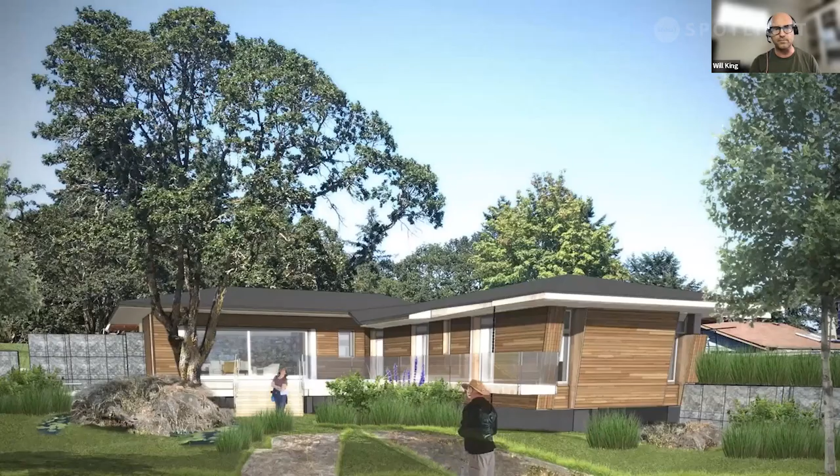So the Gabion house draws its shape and its form from its placement within its landscape. And as many of you know, there are these wonderful little pockets of Garry Oak landscapes around the Saanich Peninsula. And so this was one of them, where we had all these really cool rock outcrops and these Garry Oak trees, and within that, you get these microclimates where you have little shade areas that would have all the ferns and things. Then you have these hot arid areas where you have different types of plants and flowers, not to mention the birds and all the bugs and the creepy crawly things that are living all around. And all of this is living in unison in this one area. And we're about to come through and plow it down and put something there.

So what we want to do is ease our building into the landscape, rather than sort of claim all the space. We want to find space that'll allow us to work within this. So the house pivots around a central tree that is growing off the edge of a rock, one of the most beautiful features of this house that we found. And we use that as a shade element, as well as a social feature, as well as a play feature for the grandkids in the time being. Every time I go there, you walk up and you put your arm around the great big branch because it comes right off the deck and it's part of the building.

This building started construction just as COVID hit. So as you can imagine, it's now hugely delayed, way over budget. It's had all the problems that you can think of that came with the COVID crisis. And our owners have been very patiently working their way through that with their builders.

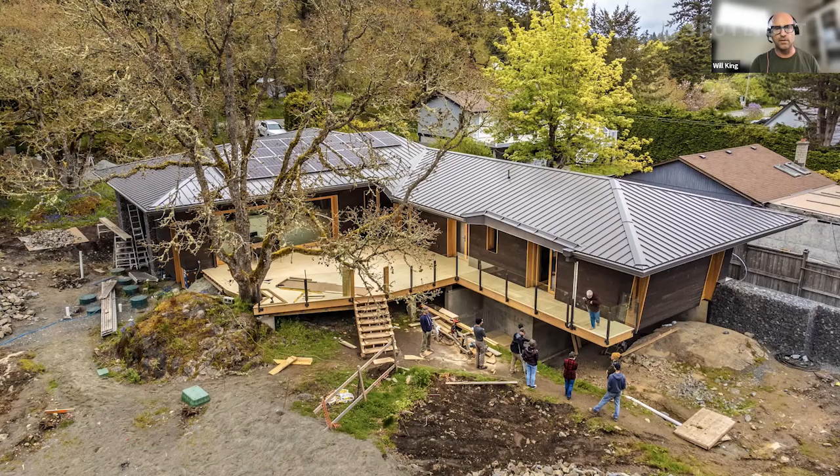So the rock outcroppings, of course, they're going up and down and up and down. Some of them had to be blasted away in order to get our foundations to work. And of course, when we talk about post-disaster structural systems, one of the things that becomes a really important feature is that we have to hold fast to that rock. And so when we move some of the rock away, we realize that we have all these little rocks in pieces. And we wanted to use those rocks as a cladding feature, as well as an interior finishing feature, as well as a landscape feature. So this is where the gabions came from.

So we have these wonderful gabion walls that are the cladding on the building that then extend out past the building. And in this case here, the wall's not finished. The picture you can see on the left is just the first half of the wall that's going to continue to march westward across the entire site, that can create gates, small gardens, entryways, as well as other features of the site for the owners.

The other wonderful thing about all of these rocks that are moving up and down is that whenever you put something in the way, water has to move differently. So we looked a lot at the way that water moves on the site through the rainfalls that are there. And there's these lush wet areas that then become very dry in other spaces. We realized that we're creating these little ponding areas if we put a house in particular locations. So rather than try and fight that, we wanted to celebrate that.

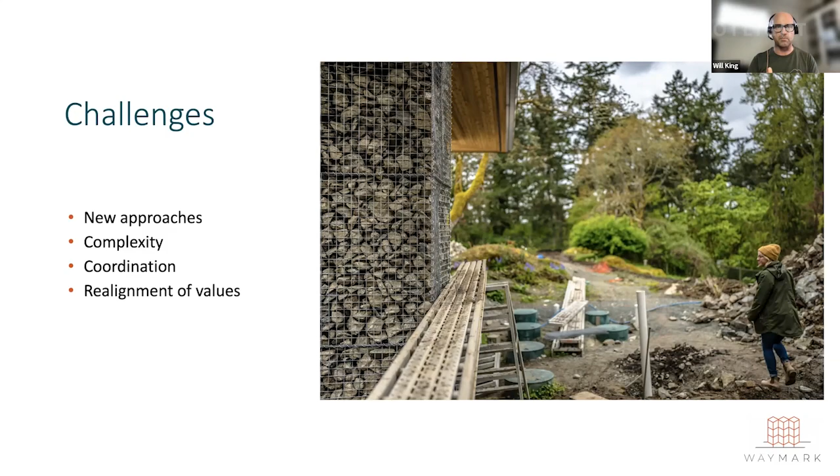Not only that, but there's a realignment of values that have to happen. And you know that any of the architects that you're going to speak to, certainly the ones in the roundtable today, but people who have tried to get these types of projects going, realize that this is not just about building a building and then adding a layer of passive house to it, or adding a layer of LEED Gold to the back end, or maybe I'm going to add a layer of carbon neutrality to my already existing design. We have to realign our values so that these become key components of the design from the start.

So, in order to empower the future and our clients moving forward, it's really important to remove these silos. We find now that we don't go into design development without a builder team. So we do our schematic design, and then when we're talking about bringing in our structural engineers and our mechanical engineers, we're already talking about bringing in our sub-trades, our general contractors, because the coordination that's required for all these parties to work together needs to happen early and often in order to actually tackle a construction process in an efficient way.

And so removing those silos is important. The collaboration is really important. And again, recalibrating the values so that you realize that all of these big ideas are actually key components of the design and not layered on afterwards. Great.

Thanks, Will. That's a very appropriate way to end. I think it sets us up for some good conversations. And thanks again to all the presenters, Terry, Chris, Will, Daryl. I think there's a lot to talk about. And for me, there's a lot of commonalities between how we all talk about sustainability, climate change, resilience, the intersectionality of all of these things that we're all trying to do better.

And I'm wondering, maybe a good place to start, and kind of playing off how Will finished his presentation, is identifying maybe for each of you what you think the biggest challenge is in terms of us moving design forward, but also what the biggest opportunity is. I don't know if anybody wants to take it on first.